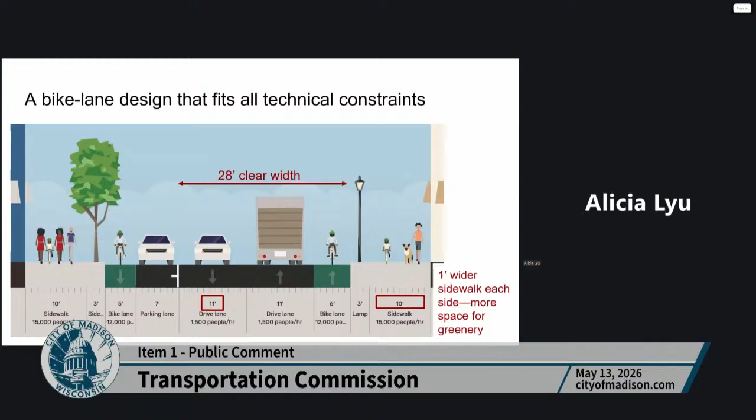And also, a difference between this design and the default design is that it uses regular travel lane width, 11 feet, which is the upper bound recommended for Community Main Street. Next. We have 1 parking lane which can alternate between blocks, so we can put it close to the small businesses. Next. But this option was never presented by staff, despite that it appeared in multiple oral and written comments and was asked about by commissioners. Next.

So these are the stats. Basically 75% of the students prefer the bike lane option and only 17% of the students prefer the current option. So I want to pause for a bit and let this number sink in, because are we sure we want to spend millions of dollars to design for the next 20, 30 years for a design that does not have a mandate from one of the most important populations in this area? Next. So just to make it more intuitive, next.

Some representative comments: space for more pedestrians and more bikes should be a priority. Otherwise, more space for cars will only lead to more cars. And also, people believe that bike lanes can actually ease congestion because it moves more people, and it also slows down traffic and increases safety. And also, eliminating parking can just make the space more clear for drivers and also increase safety.

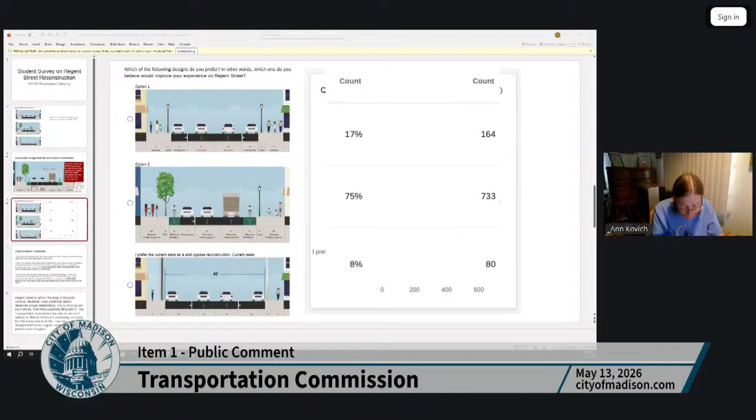Did we have anybody else under item 1, Aiden? We do not, no. Okay. Does anybody have any disclosures or recusals this evening? I don't know why a person in the attendees has their hand up. I don't think that's appropriate right now. Just gonna let that be.

Next, we have 2 items proposed for the consent agenda. Item 2 regarding the grant for Safe Streets and Roads for All, and item 3 regarding a contract with AECOM Technical Services. Does anybody wish to have either item separated from the consent agenda?

Okay, seeing no hands, do we have a motion on the consent agenda? Chris? Yeah, move approval of the items on the consent agenda. Okay, thank you. Robbie? Second. Okay, there's a motion and a second, assuming no discussion since it's a consent agenda. I'm going to assume unanimous consent vote, unless anybody wishes to vote no or abstain. If so, please raise your hand. Okay, the motion is carried.

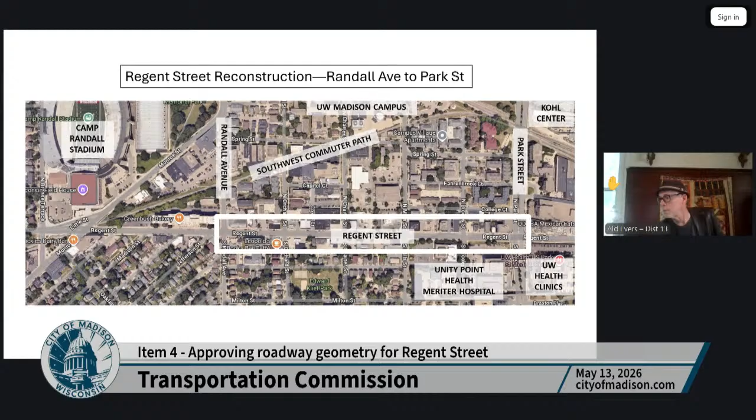Alder Evers? Yeah, the individual who had his hand raised in the participant section, Eris Blevins, he's the chair of the Greenbush Neighborhood Association. He has registered to speak. That's why his hand was raised. So perhaps he'll be called upon to speak. Since he registered at this time, it's up to you how you want to handle that.

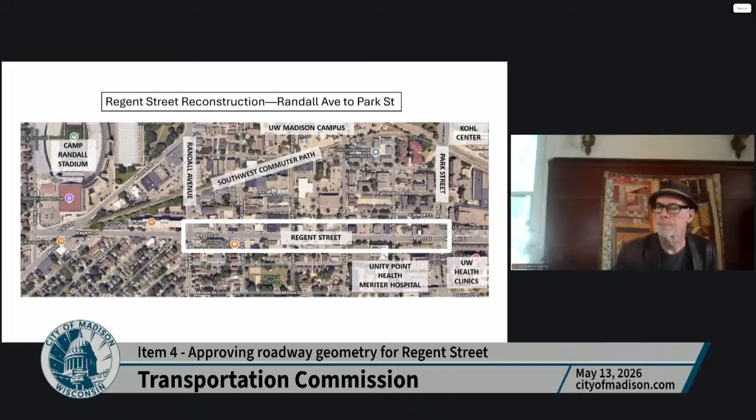So thanks, Alder. Alicia Lyu registered to speak under item 1, which is normally items not on the agenda, but apparently she had a plane to catch. So what I've proposed is what we would normally do is hear from staff with the presentation, and then we would go to people who are registered to speak on this item, and then we will go to discussion and questions. Yeah, that's great. Thank you. Okay, sure. Okay, so Tom, do you want to go ahead?

So again, let me just say first that this will be the 4th time that Regent Street has been back in front of the Transportation Commission. And we did make a recommendation to the Common Council and the Board of Public Works at our April 15th meeting. And on April 22nd, the Board of Public Works recommended that it come back to the Transportation Commission for further discussion of the Regent Street lane configuration between Brooks Street and Park Street. And staff wanted us to look at Mills Street between College Court and Bowen Court. So that's why we have it back here again today.

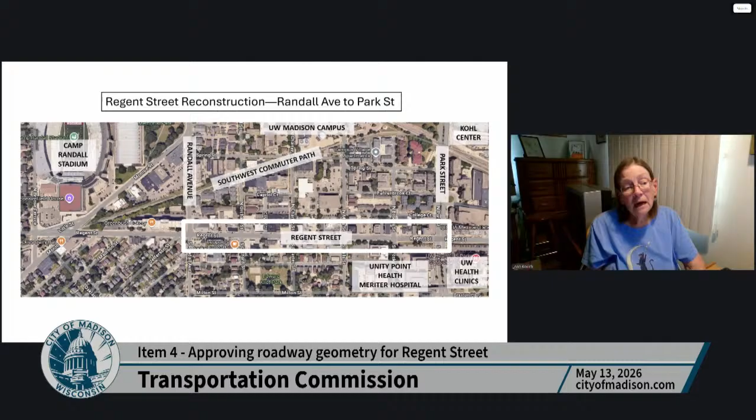And so we'll hear from Tom Moore, and then we'll hear from the people who are registered, and then we'll go to comments and discussion. So Tom? Yep, thanks, Ann. That was a good summary. That was actually my next slide, just going over the background of why we're back here. So my presentation is going to be specific to these issues. I'm not going to do the whole presentation. So these 2 areas, Mills Street and then the block between Brooks and Park, are what we're going to focus on. So first, Mills Street.

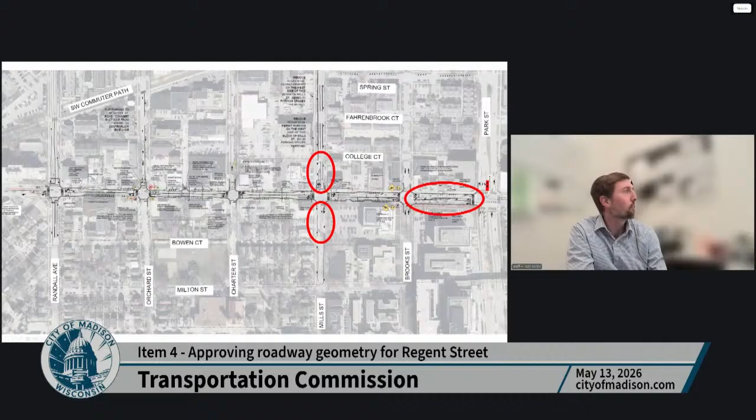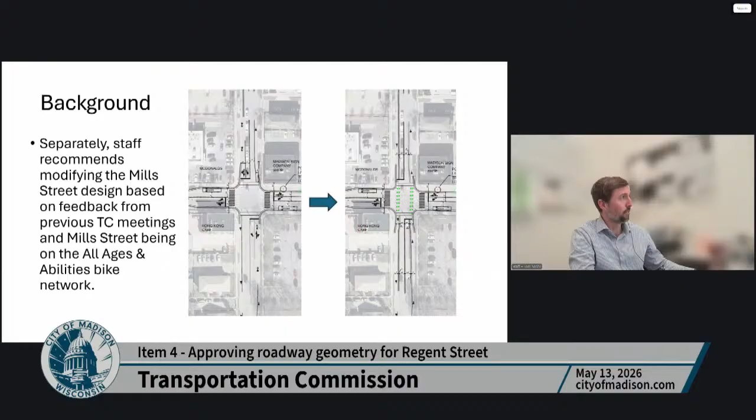On the left was the design that was in the original proposal that maintained the existing lane configuration on Mills as traffic headed into Regent Street. Since then, and based off of the discussion that we previously had, we looked at extending those buffered bike lanes right up to the intersection. Mills Street is on the All Ages and Abilities Bike Network. We were thinking that this would be focused on Regent Street and we would come back and deal with Mills later. But doing this now allows us to tighten up the radii at the corners, which is a pretty big improvement, especially at that northwest McDonald's corner where space is really limited. So we think this is a good thing to include in the project.

We modeled it; this was a concern brought up about delays on Mills Street. And one of the big topics that we haven't brought up yet is that right now there is no vehicle detection on Regent Street or the side streets. So the existing signal infrastructure is really rudimentary. It's about as basic as it can possibly be. With upgrades to the signal infrastructure, we're going to be able to handle traffic in a much better way than what we do right now. So removing those lanes is not a concern for us. Queues get a little bit longer, but nothing that is a concern.

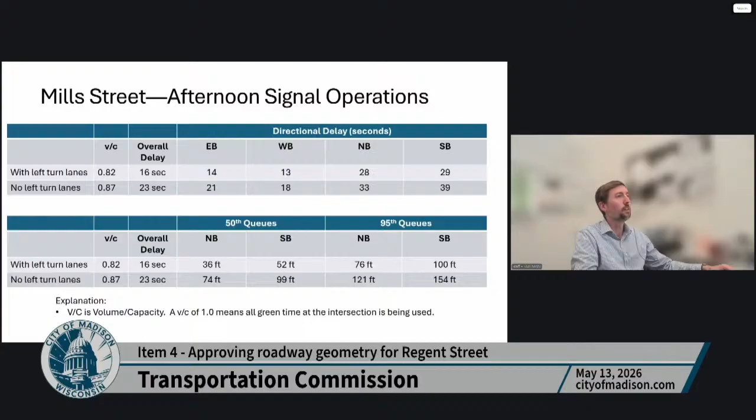So we think this is a good change in the design. So again, Mills is on the All Ages and Abilities Bike Network. Reducing the lanes allows for tighter corner radii at those two corners where we don't have right turning vehicles right next to the curb anymore. And then this change can be pretty easily managed with the signal timing. So that's Mills Street. It's pretty straightforward. And now I'll get into the Brooks to Park Street, which is a little bit of a bigger conversation.

So I just wanted to include some crash data in this presentation. This is the crash data at the Brooks Street intersection. So we've got some different things here showing the diagram, how those crashes took place, the type of crash. There's some left turns, side swipe, right angle crashes. Just some statistics: it's 113th of 1,800 intersections in Madison, 18 crashes over the 5-year period.

The colors represent the different severity of crash. The time of day. One interesting thing is that although at this intersection the concern was the morning rush hour, there were no crashes during the morning rush hour. During the morning rush hour, the heavy movement is a westbound left turn from Regent Street to southbound Brooks Street. But those crashes did not occur during that peak time in the morning with people going to work.

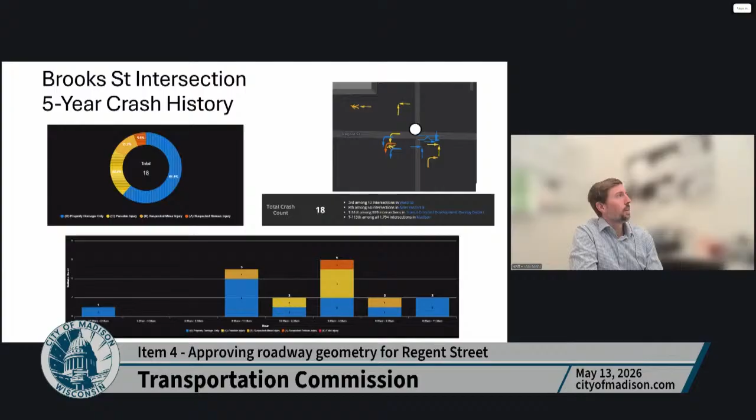So next, the Park Street intersection. So a lot more crashes here as expected with the higher volume. Left turn crashes are the highest type of crash. You can see it's ranked 24th among about 1,800 intersections in Madison. So this is a high crash intersection. You can see by time of day, the afternoon peak hour is the higher time for crashes at this location.

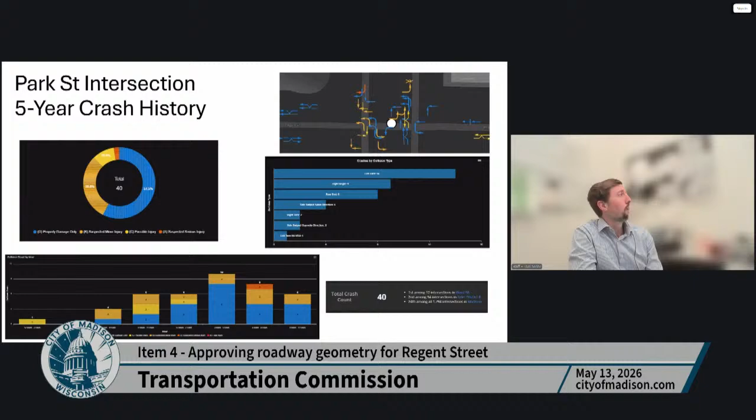So now to get into the options. So we laid this out as different options with the pros and cons, and I'm just going to go through each one here. So option one is the existing option. This is basically what the Board of Public Works approved when we were there last week. Maintaining the existing cross section, we can narrow it down. The curb to curb width here, existing, is 48 feet. If we were to go with this option, we would narrow it to 44 feet.

This has the shortest pedestrian crossing, 44 feet versus 54 feet today. Today it's longer because the crossing is closer to the intersection, so it's longer than the street width on the mid block. This option also allows us to stay out of the UW Health property. We would not have to impact their property, and there's a couple existing mature trees there that we wouldn't have to get into.

But the cons of this is that it does not allow for protected only left turns. Right now, that eastbound left turning movement is protected permissive. So they get a green arrow at the start of that phase, but then left turns after that have to deal with westbound traffic, looking for gaps. So the conflict today is with the eastbound left turn and westbound traffic, and the eastbound left turn and pedestrians in that crosswalk on the north leg. So there's an increased crash risk with those conflicts, and we feel this is not the safest design.

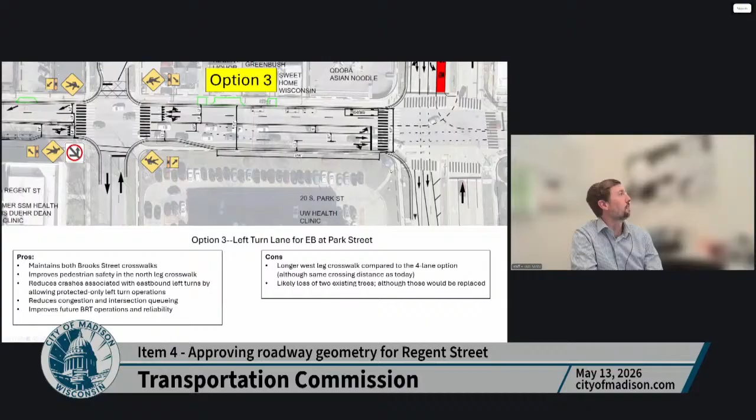We would have both crosswalks at Brooks Street. This would allow us to put rectangular rapid flashing beacon push buttons on all 4 corners to activate the RRFB from either crosswalk. And then I think I went through everything there. So cons, we would still need to get into the UW Health property here with those trees. Again, those would be replanted with new trees. And then the crossing distance is about the same as today, but longer than the 4-lane option.

Now, a separate option we looked at is instead of separating out the left turns, separating out the right turns. So this is similar to the previous option. This option actually has the best, at least in terms of our modeling, the best results for queuing and staying out of the Brooks Street intersection because we were able to overlap this right turn. So this right turn can get the green the same time that the northbound left turn gets their green. So those two phases could run simultaneously. So this one is the best operationally for traffic and queuing.

But again, this is keeping those permissive left turns and the issues that we talked about with that. But we did want to include this because we did look into it since then.

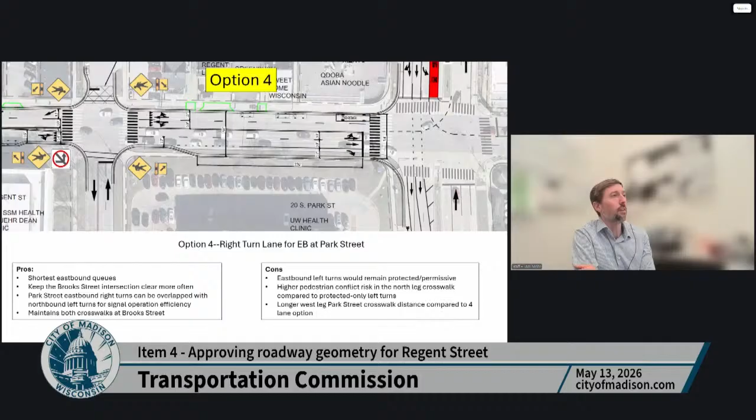These queues might be more useful. This is the 50th percentile queues. So these are the median queues. So you can see, with the 4-lane option, it's extending through Brooks Street. So that's where we're seeing regularly that this intersection is having issues. And the right turn option kind of shows how they're staying further away from the intersection. The other directions are about the same.

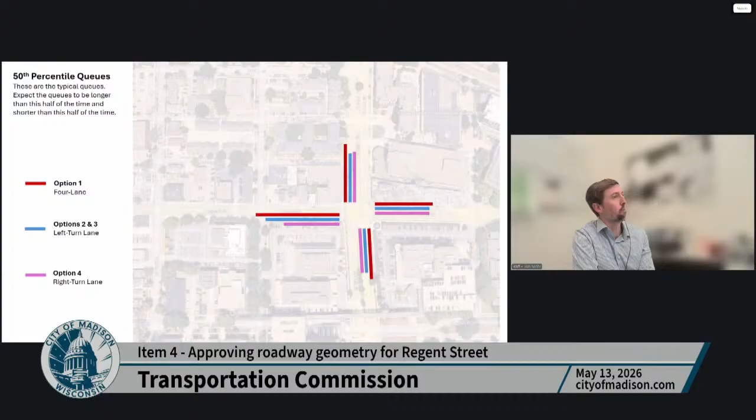Just to compare these for capacity and approach delay. So with the 4-lane option, we would run a longer cycle length. So it'd be a 130-second cycle length, although these would be running free. So this intersection wouldn't be coordinated with any other intersection. It would just be on its own. But by only having the 4 lanes, it would be a longer cycle. And then for the approach delay, this is basically showing how the additional delay is likely going to be moved to southbound Park Street.

And then the pedestrian delay, you can see that this is kind of the delay for pedestrians arriving at the intersection to cross under their worst case scenario, where they're getting to the intersection and then having to wait for the walk light. So because of the longer cycle, there's a little bit more delay for the 4-lane option. The V over C, that's volume over capacity. With the 4-lane option, we're right around that 1, where it's right at capacity. And then the other options are a little bit lower. So that just provides us more flexibility with signal timing and maintaining good operations at the intersection.

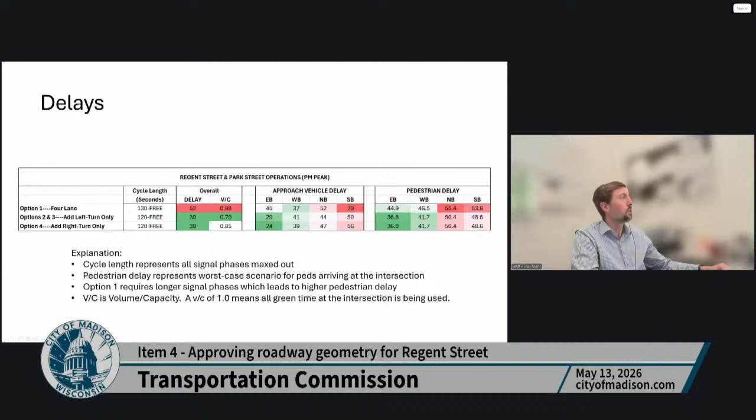So our recommendation, I'll just read through this. Although the west leg crosswalk would be longer, staff recommends adding a dedicated left turn lane at Park Street for the eastbound direction. The operational and safety benefits of a protected only left turn phase at this intersection outweigh the drawbacks of the longer crossing distance compared to the 4-lane option. This crosswalk distance would remain the same as it is today, and the overall intersection pedestrian delay would be lower. So the key benefits, it eliminates those conflict points between eastbound left turning vehicles and pedestrians in the north crosswalk, and for westbound traffic.

So it improves eastbound through traffic operations and reduces side swipe and rear end crash potential. And then this would also improve the future north-south BRT reliability and performance.

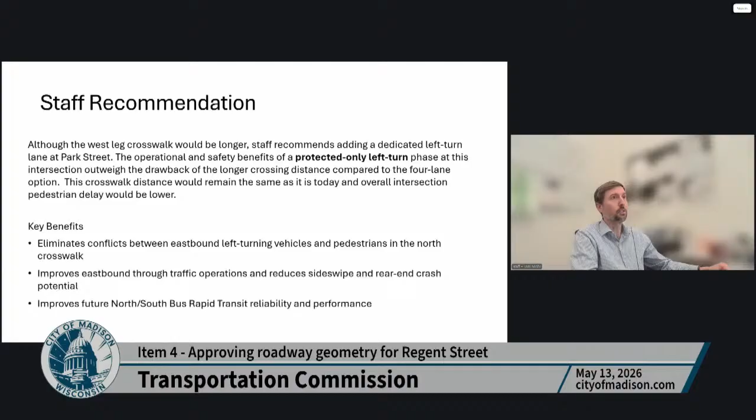So with this recommendation, we provided this slide for recommended motions. We have them separated out. So move to approve the Mills Street lane configuration. And then for the second option, it would be move to approve the lane configuration between Brooks and Park Street, which includes whichever option. After internally talking this over more, our recommendation is an eastbound left turn.

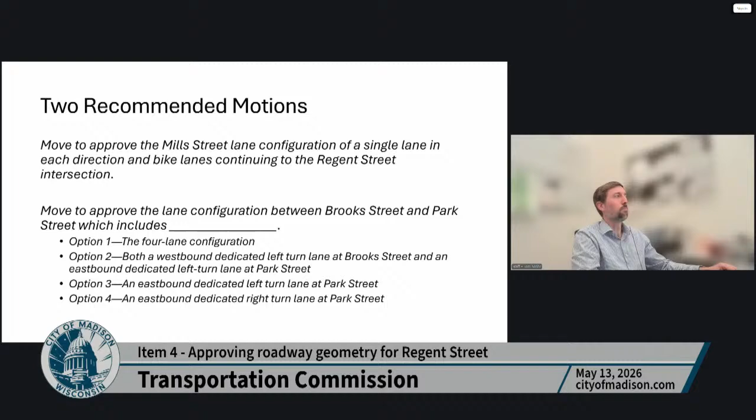We were kind of thinking option 2 or option 3 are about the same, but really option 3 provides the benefits that we're looking for and also maintains the pedestrian crossings at Brooks Street and still does a good job of keeping that queue out of Brooks Street. So option 3 would be our recommendation as kind of not what was approved at TC last time and not what was approved at Board of Public Works, but something in between. So that is our presentation.

Oh, you're muted, Ann. Thank you so much, Tom. Ariana, it looks like Lynn Olson did finally get into the meeting, but she's in the attendees queue and she needs to be moved into the panelist queue, please. Okay, yep, she should be moving.

Okay, thank you. All right, so pretty sure we have a lot of people registered to speak, Aiden. So who do we have first? So first we have Nicholas Davies of Regent Street, opposes and wishes to speak.

Good evening. In the near future, Regent Street will have hundreds more residents who live and or work on Regent Street. For these hundreds of people, most trips will start and or end on Regent Street itself. Whether the street outside your front door has a bike facility or not matters a lot to your ability to get around by bike. A week ago, I was in Paris, where they have been rapidly transforming their street network, creating not just isolated bike through routes, but a bike network that reaches into all of their commercial corridors and arterials. And they're not leaving any streets out based on the short-sighted whims of business interests. The comprehensive network effect is what has sent cycling mode share sky high.

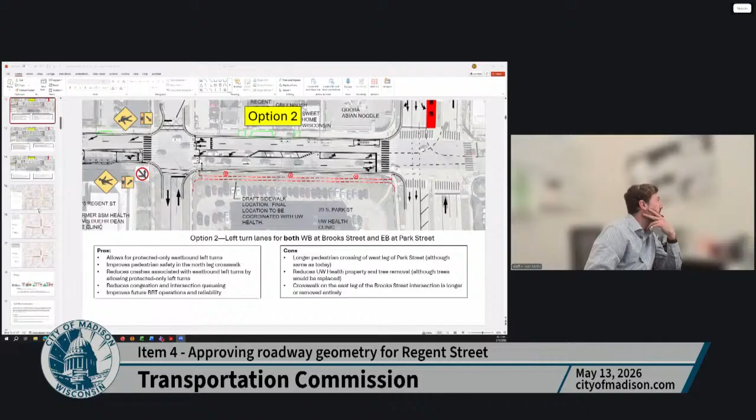Alder Okovich, go ahead. Yeah, thank you, Anne. So Tom, I emailed you this question before, but looking at option 1, I was wondering specifically about a configuration that keeps the narrowed crosswalk on Park Street, at Regent and Park Street, but also has just a dedicated left turn lane with a combined straight and right turn lane on option 1. Did you look at that? Yep. Let me pull it up here. So yeah, we did model that today, and I'll show you kind of the results. Okay, so we kind of just added it to the table here.

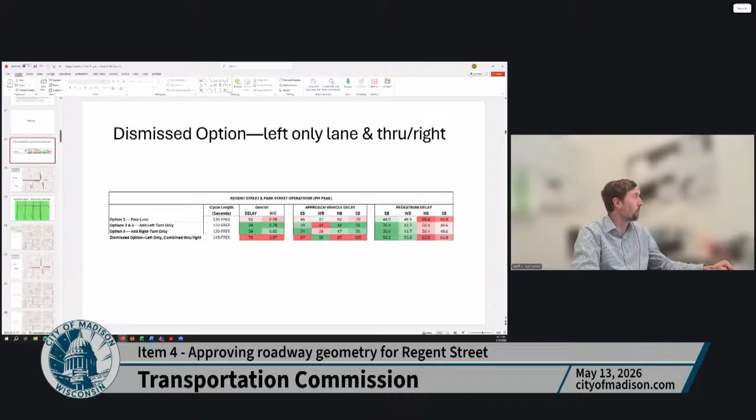So this option would be a left only, and then combining the through and right. So it would be the same width for the crosswalk, but we wouldn't have the 2 eastbound through lanes. It would be 1 combined through and right. So basically everything just gets more congested. The volume over capacity is over 1. You get a lot of delay and backups. You can see southbound Park Street really takes the biggest hit, and then eastbound Regent Street. So they're both really struggling.

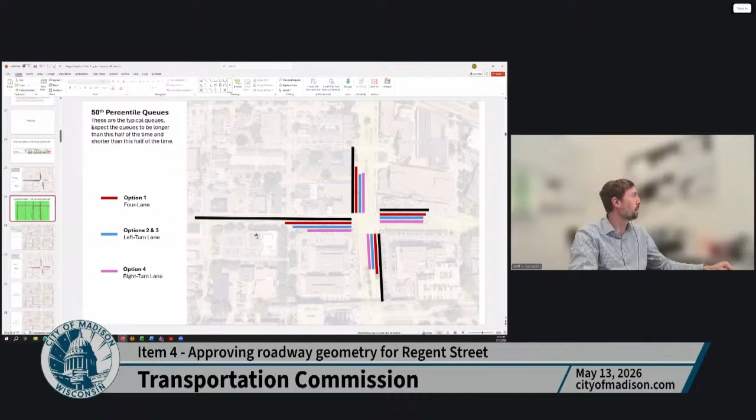And what ends up happening when we modeled it in SimTraffic, where it's an actual model, is that the Brooks Street intersection just really never clears. So any sort of traffic northbound Brooks just continually backs up, and then eastbound Regent Street continually backs up. So this is showing the queue going through the Mills Street intersection. There's just a lot of eastbound traffic, and going down to only 1 eastbound lane makes it just not work. Here's a picture of the model showing what happens on Brooks Street. There's just no gaps at all in the eastbound Regent Street traffic, so there's no opportunity for Brooks Street to move.

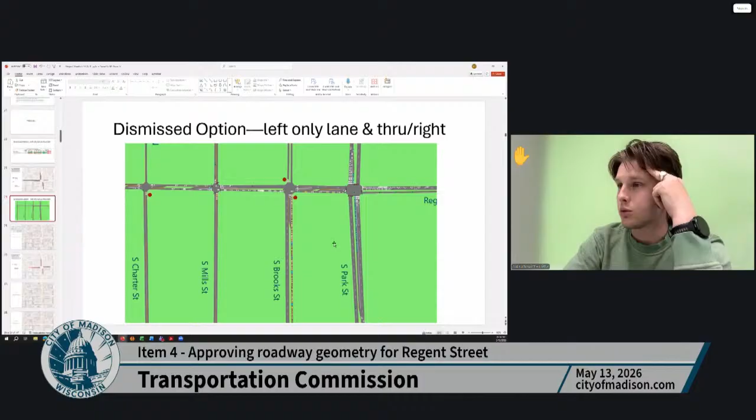Yeah, I guess what surprises me about that is that it's also only 1 lane the rest of Regent Street. So how can it have such a... Yeah, it's 1 lane, but it's the signal timing at Park Street where we need to give more time to Park Street that then allows this traffic to queue up and keep the Brooks Street intersection open. And this is with the BRT timing, so that does play into it as well. Because you mentioned right now there is no detection on Regent Street. So is this timing with detection?

Yes. This is a stop controlled. Brooks is stop controlled. It's not signalized. So pretty much under this scenario, anyone on Brooks Street would be relying on traffic to wave them in, which the model doesn't do. So that's likely what would happen under this scenario. But then what that would mean is just more queuing through the intersections on Regent Street in that case, if people were waving Brooks Street traffic through.

Okay. And then the other question I wanted to ask, is there any emergency vehicle prioritization on Regent Street right now? Right now, there is not. No. And that's one of the things that will make things a lot better for emergency vehicles. So what we can do and what we plan to do with this project is provide that detection. So if there is like an ambulance or a fire truck at Randall, we can clear out eastbound traffic. So that vehicle can have all Randall, Mills, and Park Street go to green and flush out eastbound. So that will be a big benefit to emergency vehicles because, right, there is nothing right now for that. Okay.

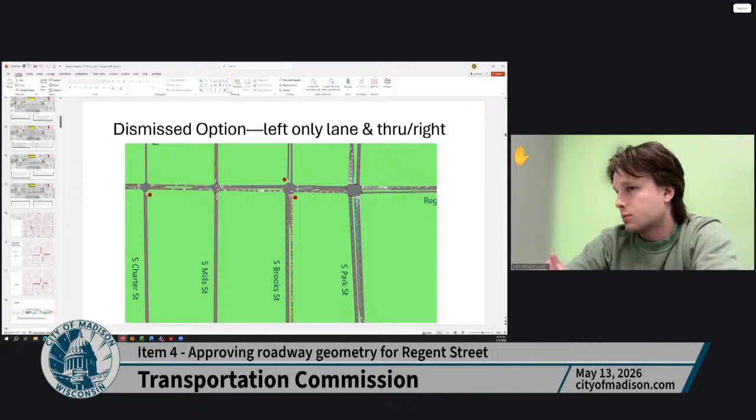Last question. I guess two questions related to blockage at Brooks Street. Right now during peak rush hour, which is basically the afternoon rush hour, is when we would hit the 95th percentile queue length. Do you know if in general we get better driver behavior around not blocking intersections if it's one lane versus two lane?

Just anecdotally, it's kind of the same situation as on West Wash at the Southwest Path when there's two lanes. It's difficult for anyone on the side street when there's two lanes because they've got to make sure both lanes are stopping, where in this case, with one lane, it's a lot easier. And then you don't have the issue of the one driver yielding to the side street and then at the same time blocking the view of the driver in the adjacent lane.

So, right, that's part of the reason for going to this option 3, and this is very hard to model, is whether the intersection is blocked or whether it's not blocked, and drivers can get out or get in with this left turn, the westbound left turn. We do think that with the one lane that will operate better for those movements. Okay. I will leave it there. Thanks, Alder. Chris, go ahead.

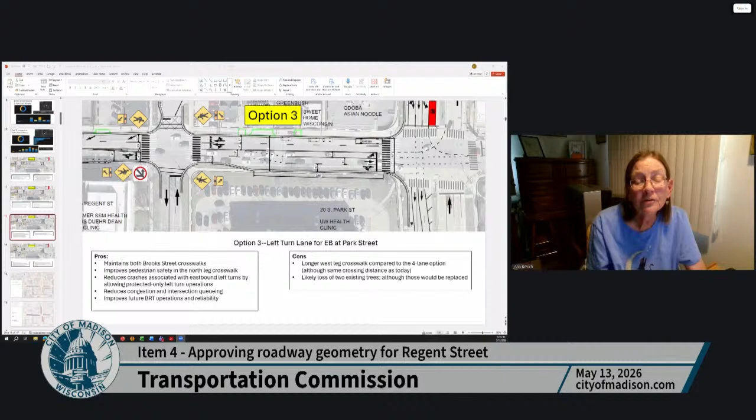Thanks. First, I just have a process question. I don't know if this is for Ann or someone else, but with the back and forth with Board of Public Works, if we recommend, say, option 3, what's next? Because that wasn't what was approved by Board of Public Works. My understanding is it would go back to Public Works because they're in control. They have to make the final recommendation to the Common Council. So whatever we do tonight would go back to Public Works is my understanding. Okay, thanks.

And then a question for Tom. On option 1, from where we sit, it's kind of hard for us to weigh the trade-offs between the downsides of the longer crossing on Regent at Park Street, versus the left turn conflicts that we're talking about, eastbound from Regent to Park Street. And I'm not concerned about the vehicle delay so much, but we're talking longer cycle lengths, more delay for pedestrians, and potentially more of those left turn conflicts with pedestrians. Could you just talk us through that a little bit more, what's the standard for cycle lengths and pedestrian delay?

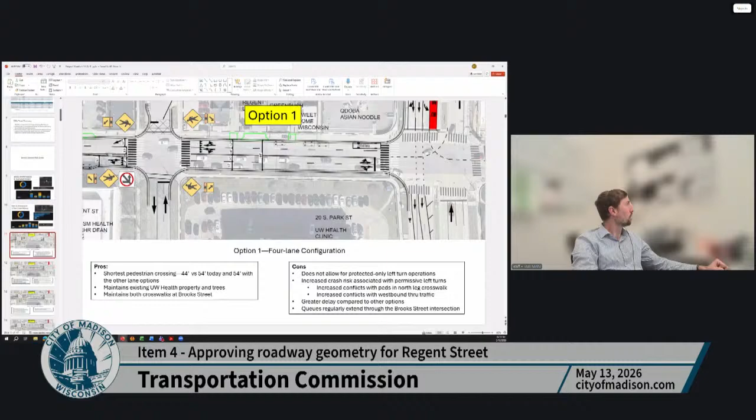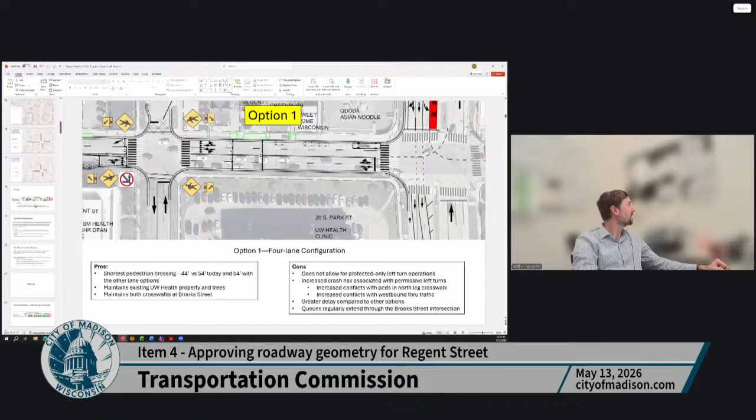Yeah. Good question. Thanks. Let's see. Thought I had it here somewhere. 1 second. Here we go. So we're modeling option 2 and 3 as a 120-second cycle length. That's 2 minutes. That's a long cycle length. I think the highest cycle length that we have is probably the Hairball, John Nolen, Willy Street.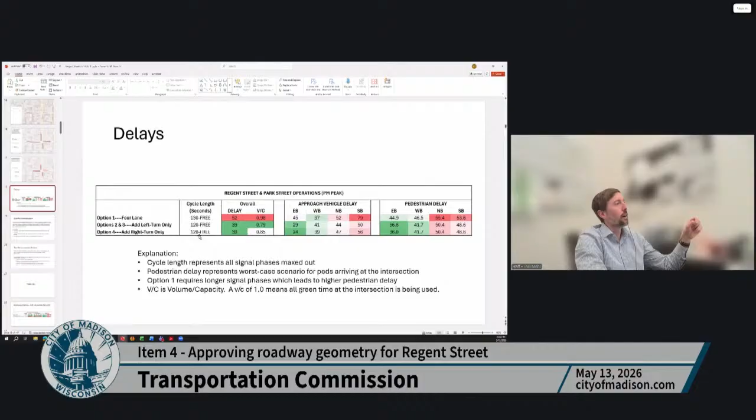And that gets above that, but typically for a long time, any of our coordinated corridors, University Ave, Johnson, East Washington Ave, the cycle length would be 110 second cycles, and we were always very careful to try to cap it at 110 seconds because that gets to be a long delay for the side streets. So these are long cycle lengths, but you also have to keep in mind that this is running free. So this is the cycle length when everything is maxed out, which will likely happen in the afternoon. So that 10-second difference, that's not nothing. That's substantial. If we could go lower than 120 second cycles, we would, but this is what operates the best, given all the different variables that go into it.

What will happen in the real world is we will watch it play around with the max timing and the different options when it's going on, and try to make it as balanced as possible. You just can't make it perfectly balanced, so there's always going to be one direction that's a little bit more congested than others. In this case, it is the southbound Park Street direction that takes probably the biggest hit when going to the 4-lane option.

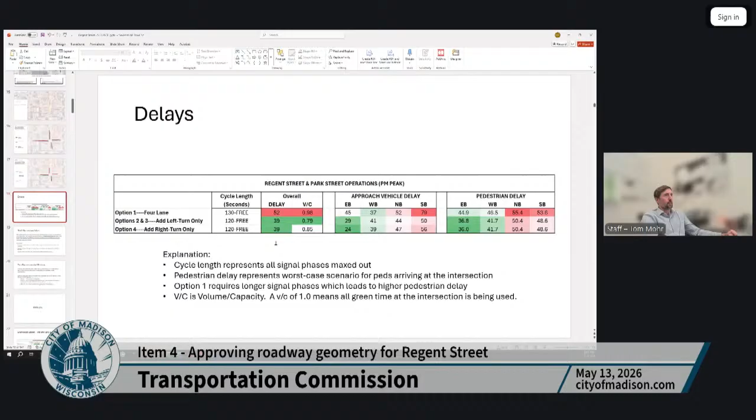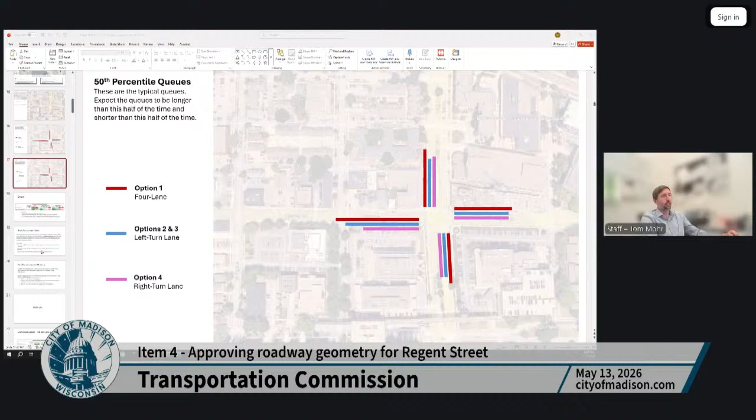In terms of protected only left turns, we've seen really good results on East Washington Avenue in terms of crashes and safety improvements since we've implemented protected only left turns, and a lot of that went in with East-West BRT. So we think that is a pretty clear safety benefit in terms of option 1 versus 2 or 3. In this case, it allows a lot more options for us in terms of signal timing during the peak hour.

The eastbound gets the green arrow, pedestrians aren't moving, westbound's not moving, and then they get the red and they sit and wait until the next green arrow. Whereas today, the green comes up for eastbound and the green arrow comes up. So the first few vehicles can make that protected left turn, but then every vehicle after that is making a permissive left turn where they're looking for gaps in the westbound traffic, which there typically aren't many, and then making that left turn where pedestrians are something they have to look at at the same time as the gaps in westbound traffic.

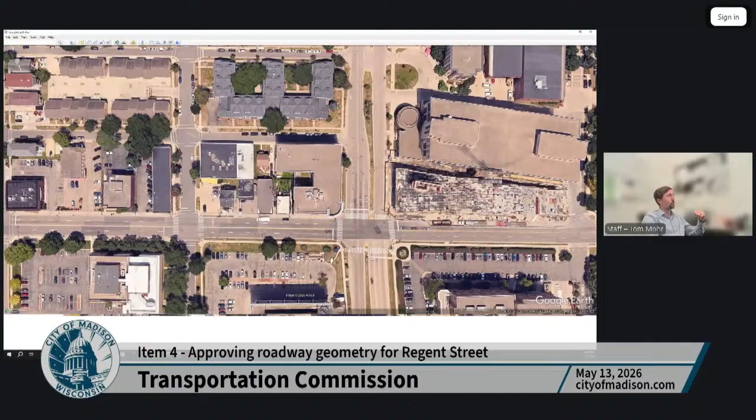And the trade-off being about 10 feet of pavement. It's a pretty small trade-off in our view, since this is a congested intersection, we're going to be providing that northbound. So regardless of pedestrians or not, we're going to be providing that time to get across here. And this northbound left turn will also be protected only. So these pedestrians aren't in the same danger as these pedestrians under the current situation. So the extra length here, which is a little bit of extra time, I think it's a pretty clear trade-off to provide the safety benefit to these pedestrians at the expense of this extra time crossing this crosswalk.

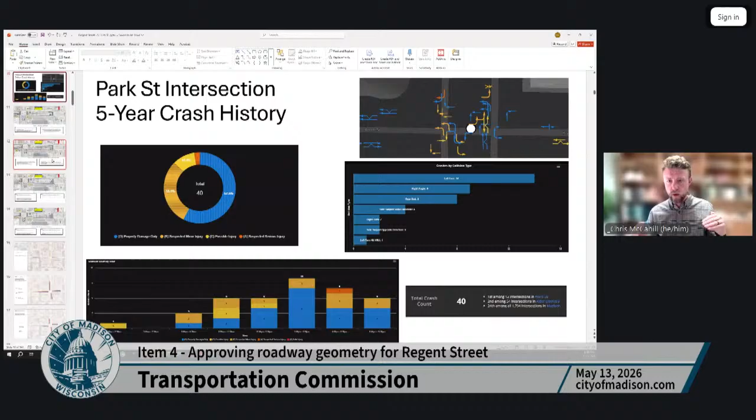Thanks. One more quick follow-up, just on pedestrian delay, right? So on that northern leg, we're seeing under all scenarios it gets into the red. Do you typically have rules of thumb for what happens when you get to a certain level of pedestrian delay? Maybe when do people start just crossing anyway or things like that? Are there rules of thumb around that kind of thing?

I don't know of any for pedestrian delay. I do know for vehicles, that's kind of when I was talking about the 110-second cycle, and we're giving like 80 seconds to the major street and 30 seconds to the side street, where the person on the side street is waiting that 80 seconds. That's where it starts to feel like, am I ever going to get the green? What's going on? So that's the concern with having these extremely long cycle lengths, that people will start to just go or think that there's something wrong. I think 55 seconds is getting close to a minute.

I don't know if it's at that level, at that timing, but it's a long time. It's going to feel like a long time standing out there. Okay, thanks. Chris, I just dug out my copy of the page from the last Common Council meeting, and it shows a referral back to TC today, Board of Public Works on May 20th, and then the council on June 9th. So that would be currently the plan.

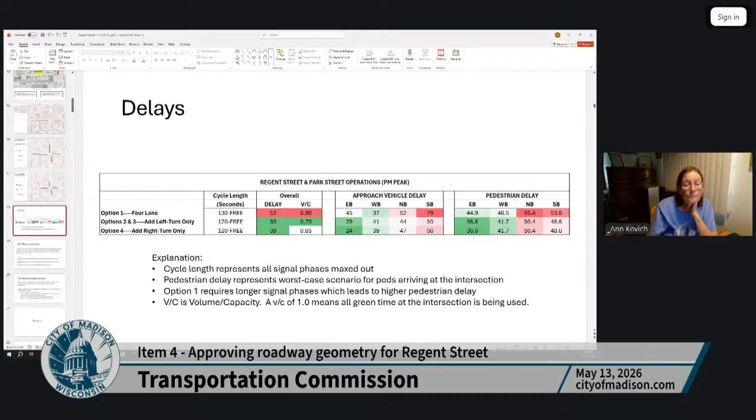Yes. Thank you, man. Sorry for that delay. I'm actually traveling at the NACTO conference, so joining from there. Sorry, trying to find the button.

No problem. So I have seen research on how much delay will cause a high likelihood for pedestrians to start to disobey the traffic lights. Generally, I believe that's about a minute or so. So if pedestrians feel like they're not going to be served after they wait for 60 seconds or so, there is a high likelihood that they're going to disobey the traffic signal. So just want to share that information. Thank you.

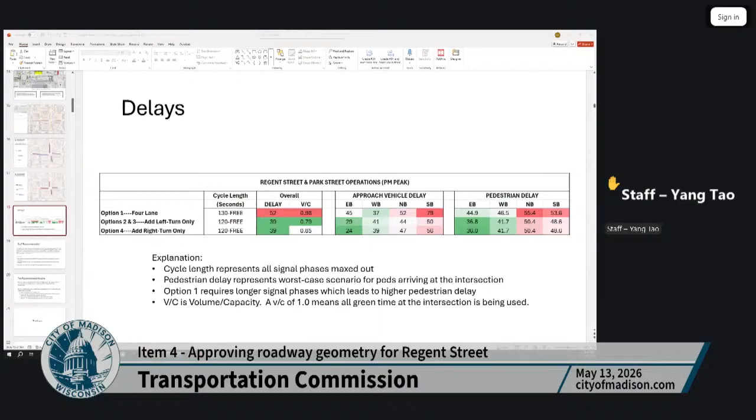Thanks, Yang. And to your point, Tom, you were saying these numbers on this slide are really reflecting the peak hour in the afternoon. Does that mean those numbers are going to be lower for people waiting during the rest of the day? Yeah, they'll be lower during other times. So the signal timing will change, especially since this would be operating free.

Right now, we have the Regent Street signals coordinated, so they kind of stay on 50 seconds this way, 30 seconds the other way, 50 seconds. It kind of stays within that. With operating free, it's on its own. So as there's less traffic, it's going to go through those phases faster.

So yeah, this is the worst case scenario during the afternoon. It's not going to be like this all day. Okay. So my next question is about, I think if I'm getting this right, the options I have, the right turn only lane or the left turn only lane, they have in mind easing the traffic of Regent, but then also I'm trying to think of the impact after the intersection and what would it mean, since we're bringing more cars than we were bringing before from Regent to Park, both northbound and southbound.

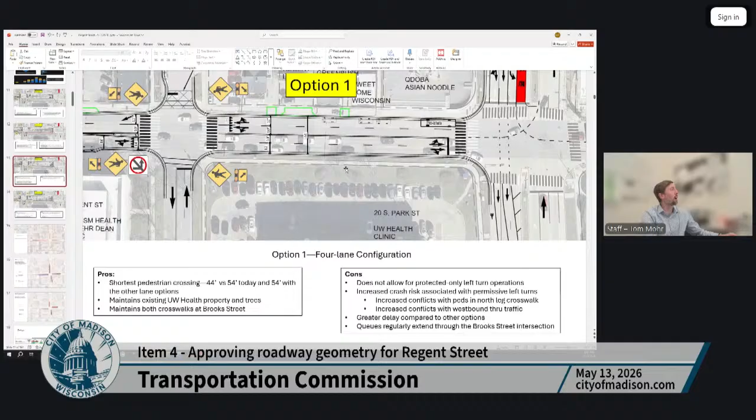But part of wanting to do this now is that this is going to be completely torn up with this project. The storm box that's 20 feet wide is going to come through here and through the Park Street intersection. So there are going to be pretty major impacts to traffic during construction, and doing it now would make a lot of sense in terms of how badly that's going to affect traffic. And again, we assume BRT is going to be here well before any UW Health expansion, so the benefits to BRT.

Matt Phair does appear to still be here. Did you wish to hear from him, Harold? Sure, why not? Yeah, can we have Matt, please? Hi, I'm here. So the question is just on what our plans are, if we have any. Yes? Yes.

So the answer is we don't have any specific plans. I assume, and our leaders assume, and I think we can all assume with the access pressures on our healthcare system, and this prime spot, we will be developing at some point in the future, but truly, and I'm not trying to evade the question, it could be 3 years, it could be 10 years, and we just don't know. So it could be longer than that for that matter. I know that sounds like a vague answer, but that's actually the honest truth at this point.

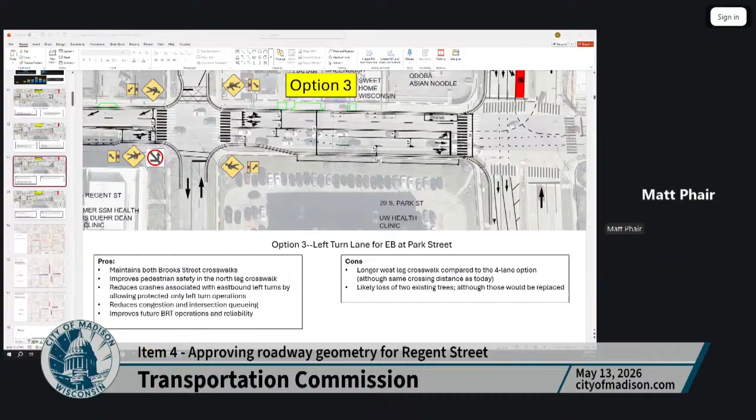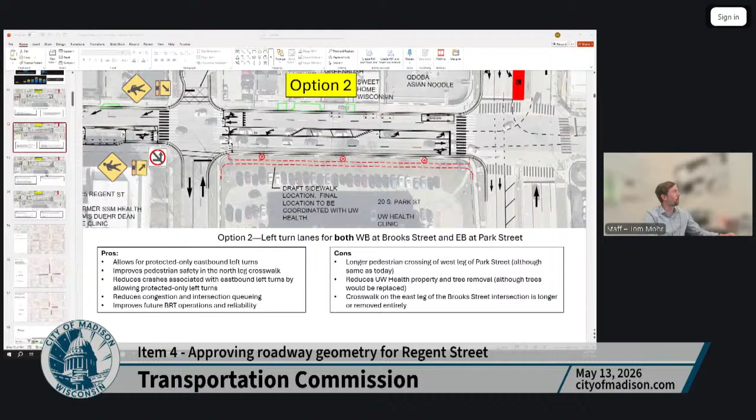You bet. Okay. And then option 2 was the one that TC previously approved. That's correct. Yes. And did that not have the crosswalk on the east side of Brooks Street? Right. Yeah. So when we proposed this, the idea was to move the RFB to just this side because of this longer crossing and the conflicts with the left turns, to have pedestrians cross on the west side rather than the east side. But yeah, with option 3, shorter crossing, we think this makes sense to add this in and provide the RFB on both crosswalks.

Right. Yeah. No, I mean, I think not having that crossing will just lead to people making a run for it. And speaking of pedestrian delay, yeah. Okay. Thanks. I think that's all I had for now. Thanks, Harold. Alder Kovich, go ahead.

Yeah, thank you, Ann. I guess one of the things I'm struggling with is just we have to trust the models a lot. And to Harold's point, there are instances when there might be less traffic. You brought this up earlier, Tom, and I feel like it's worth reiterating, but you were asked about pedestrian crossings. And you said it would be pretty long, and so pedestrians would learn not to cross there, because the delays are significant. But the same logic applies to a lot of the traffic flows that we're talking about right now, including delays at John Nolen leading to less traffic today. And so I just don't want us to fall into the trap of thinking that we're always going to be at maximal traffic, or the only levers that we have the ability to pull are the lane configuration at Park Street.

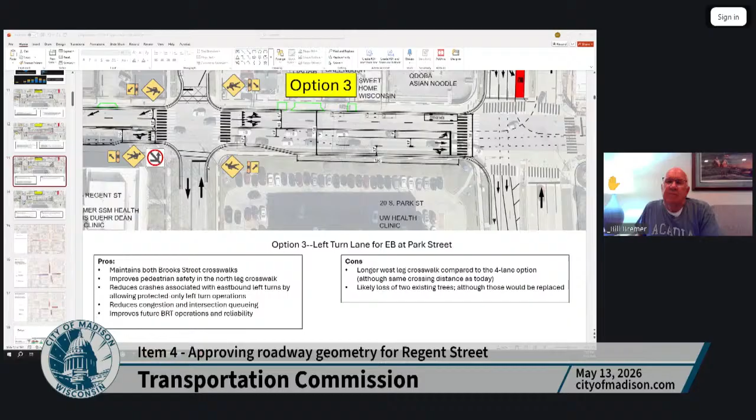I'm not in favor of option 4 because, as was just mentioned, sometimes I think people would treat that like a slip lane, and I don't want that to happen at all. So therefore I really like option 3. Thanks.

And I'd like to add, just thinking about this more. So option 4 with the right turn, even if we were able to limit that to a protected-only right turn on a green arrow, we've just had a lot of problems with compliance for right turns. Whereas left turns, they have the red arrow, they're pretty set, they're not moving. Right turns, we're going to talk about it in a future meeting about right turn on red, but the compliance there, I think we would likely see issues with that.

Okay, thanks, Tom. Thanks, everybody. Pepe, go ahead.

Question for you, Chair. There was a person that presented that presentation about the survey they did. Can I still ask them a question if they're still around? She had to go. She was on her way to the airport, and I don't see her in the queue yet, Pepe. That's why she registered under number 1, because she had a timing constraint, and I don't see her still available. Okay. Yeah, otherwise we could go back and ask her a question, but she doesn't appear to be in the queue

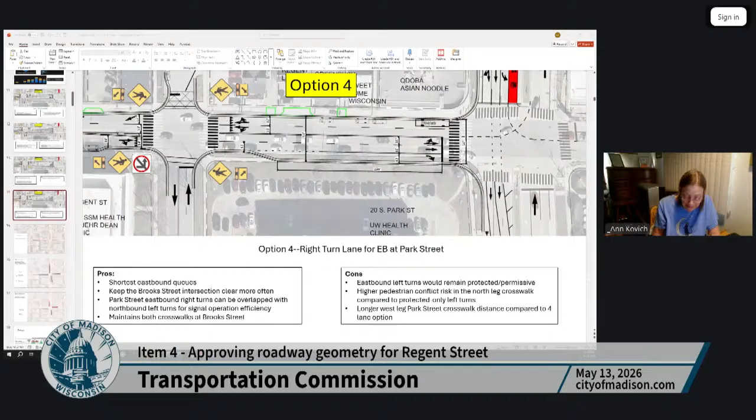So would that make sense, Chair, if I move the motion to approve the recommendation for Mills Street? Just to get that one out of the way. That would be, and the suggested motion is to move to approve the Mills Street lane configuration of a single lane in each direction and bike lanes continuing to the Regent Street intersection. Is that the motion you would like to make? Yep, I would like to move to approve the Mills Street lane configuration of a single lane in each direction and bike lanes continuing to the Regent Street intersection.

Okay, do we have a second? Alder O'Brien? Yeah, I'll second that. Okay. Do we have any discussion on the Mills Street? Carl? Yeah, thank you, Chair. Tom, since this is an option that came up pretty late in the process, how much room do you think there is still for refining it? I was thinking, did you look at an option that has a protected intersection where you don't have right-turning traffic probably moving into the buffered bike lane?

And I guess, I'm fully in favor of this. I'm just wondering, since it's been added late, if the details could still be refined. And I guess that would be something that would happen between now and approving plans and specs sometime later. Is that correct? Yeah, I think, if this is the general concept, it will come back with final design. So little tweaks like that could be added in. But yeah, the big concept here is removing those lanes on Mills to provide the bike lanes. Thank you.

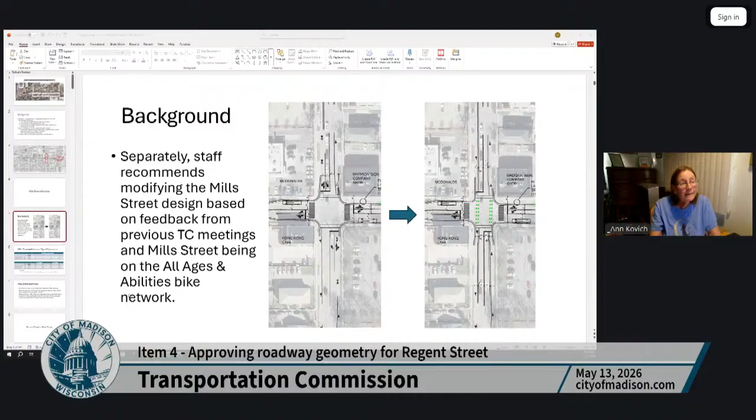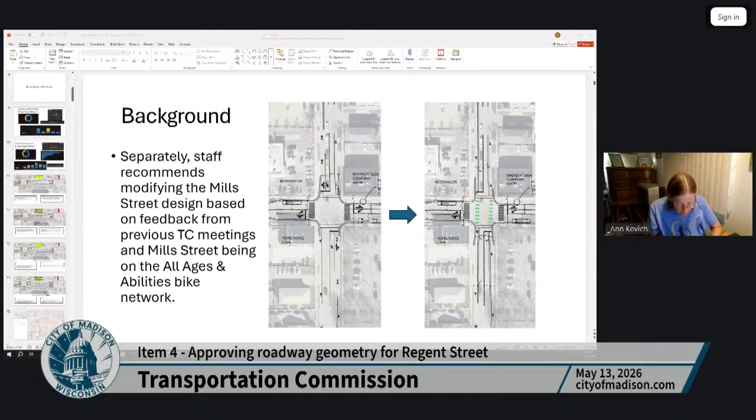Okay, I am going to assume a unanimous consent vote on this motion, unless anybody wishes to vote no or abstain. Please raise your hand. Okay, that motion is carried unanimously. Then we have the other issue with regard to the block between Brooks and Park Street that we've been talking about. Alder Kovich. Yeah, I will move to approve the lane configuration between Brooks and Park Street, which includes option 1. Do we have a second for that motion? Alder Evers, you can't second, sorry.

Since you're not on TC. Robbie, you want to second that motion? I'll second. Okay. We have a motion and a second. Discussion. Alder Evers, did you wish, or would you like to speak to your motion, Alder Kovich, and then we'll go

to Alder Evers? Yeah, I would just quickly say I chose option 1 because it's the first one and we need one to have a discussion. It's not necessarily the one I think is the best, but I do like option 1 or option 3, I think, are the two that I think are the best, but was picking option 1 so that we have a discussion. Okay. Alder Evers, go ahead.

Thank you, Chair, and thank you, Commission members. I'm not in favor of option 1. I think option 1 essentially represents the status quo. And the status quo, from what staff has shared, is unacceptable in my mind because the current status quo is a dangerous intersection. And there's been some talk about pedestrians and others and motor vehicle drivers avoiding this intersection for whatever reason, so that we don't really know how heavily it would be used.

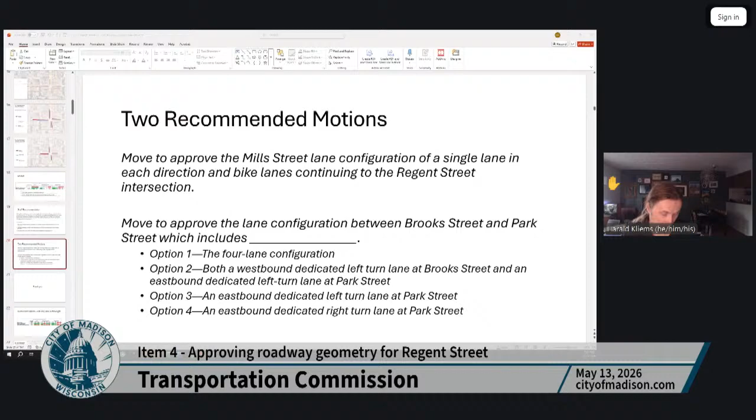And so with the options presented to us today for this particular block, I think option 3 is the best one. I think the protected left turns are a huge safety benefit and really important for the BRT station. But yeah, if the Common Council came back and said we have complete green streets and TC needs to go back to the drawing board, I would not be disappointed. Thank you. And that's still a possibility. Alder Figueroa Cole, go ahead.

Alder, I'm here. I'm sorry. I'm on the phone and I sure figure out where the button goes.

Again, seconding Harald's position on this. I think I heard one of the alders speak about discussions in the future about emergency services. I really would like for the commission to consider having discussions on a policy that will help us deviate from the complete green streets policy in a way that is more predictable, not this one-off, because honestly, this doesn't help anybody.

So you guys know me, I'm extremely supportive of this policy, and I get this is a very difficult project, but it just holds us accountable also to the public to have clear expectations when these types of decisions are made. So hopefully in the future the board can have a topic of discussion on how to use this particular project as an example to build a policy that allows for exceptions, and what that would look like.

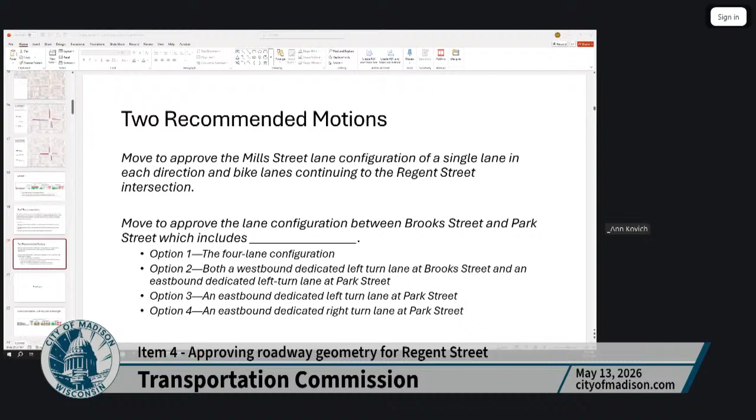Thanks, Alder. Complete Green Streets is going to be coming to TC at some point here in future months, and staff is keeping track of things like emergency access. We've talked about that a lot, and in my opinion, we need to see something in Complete Green Streets that addresses that. So that's something that we can look forward to in the future.

And I'd just like to take this opportunity to say I also support option 3, but I'd also like to make the observation that when this came to TC on April 15th, we supported option 2 because Board of Public Works saw something and asked questions and sent it back to TC. Staff came up with what I personally think is an even better option, which is option 3.

So what I would say is, wow, the process is working the way that it was designed to work with, in my opinion, the added benefit of having this conversation create an option that I think I heard Tom say he likes even better than the option they had last time. So in my mind, the process is working really well.

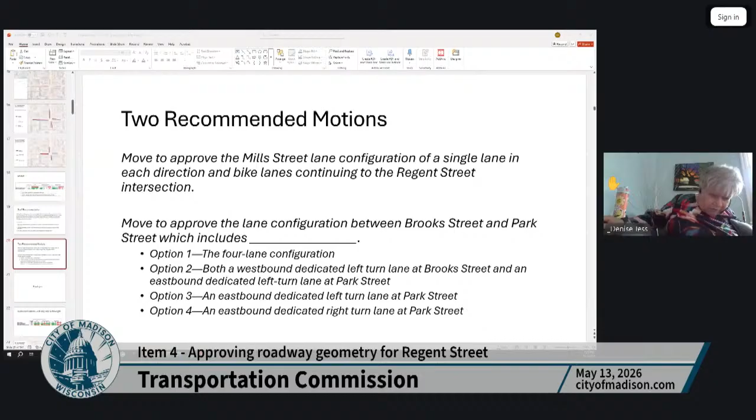Thanks, Denise. Hey, Ann, this is Yan. So sorry, I couldn't find my raise hands button. Oh, sure. Yeah, my computer is out of battery, so I'm joining from my phone.

Yeah, if it's okay, I want to add that as staff, we struggled a lot about this one as well. Especially, we really appreciate the thoughtfulness from all the public members, whether those are people who use this corridor on foot, by bike, or businesses. Those are definitely all valid inputs, and we really appreciate hearing those.

One thing we struggle with is how to balance and accommodate all the valid needs out there. My thought is that it really depends on how you view this. You can argue that this is a variation from Complete Green Streets. I totally see that, right? However, you can also argue this is in the spirit of Complete Green Streets, because my belief is that when we talk about Complete Green Streets, we're not talking about a particular street. We are talking about a network.

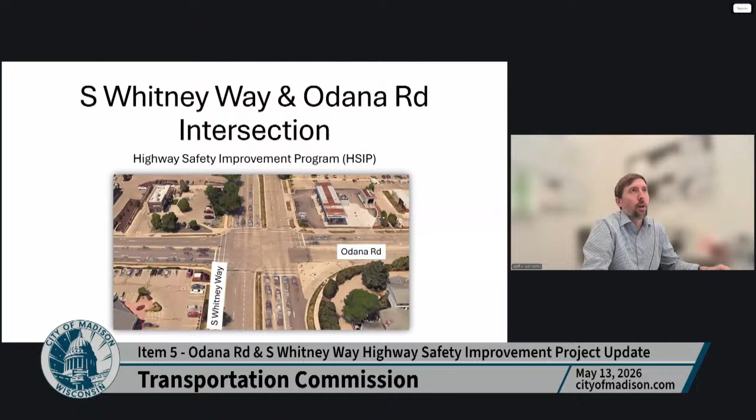Thanks. Yep, so this is the Whitney Way, Odana Road Highway Safety Improvement Program project. So this is a little bit of a different process, and I'll go through it. So what is a Highway Safety Improvement Program? So it's a federally funded program where the FHWA distributes funds to all 50 states. Those states then administer this program where different entities can apply to the state with project ideas, and then the state evaluates those projects and chooses whether to fund them or not.

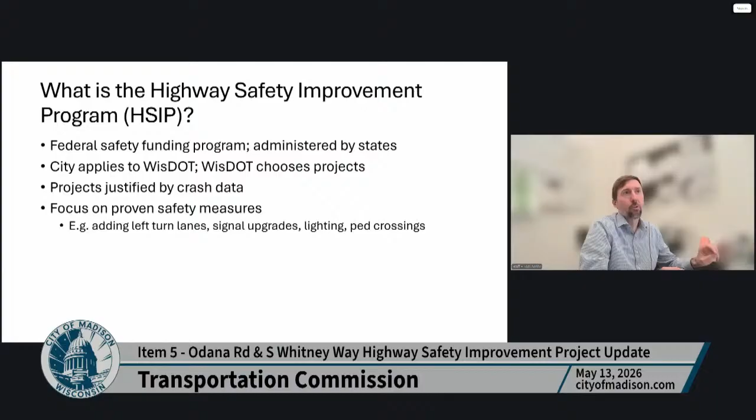These are kind of based off of crash data and based off of proven safety countermeasures. So things like adding left turn lanes, signal upgrades, lighting, pedestrian crossing improvements, things that are known to reduce crashes. So we had a similar project. I think actually these were applied for and received funding during the same year. This was at Gammon and Watts. This was constructed, let's see, I guess it would be 2 years ago.

So this project was very similar with similar improvements of upgrading all the signal infrastructure, adding signal heads over each lane, where in the past there was only one over a lane. Basically improving the visibility of the signals, redoing the crosswalks, pedestrian ramps, and then in this case, it was offsetting the left turns on Gammon Road. So with the Odana Whitney project, this was applied for and awarded in 2022. And this is right from the application of what we proposed for improvements.

So similar to Gammon Watts, we improve the visibility of signal heads at the intersection, convert the traffic signals to monotubes with signal heads over each lane. Use of retroreflective backplates on the signal heads would further improve visibility. Improve signal timing to meet MUTCD standards and to implement emergency vehicle preemption is also recommended.

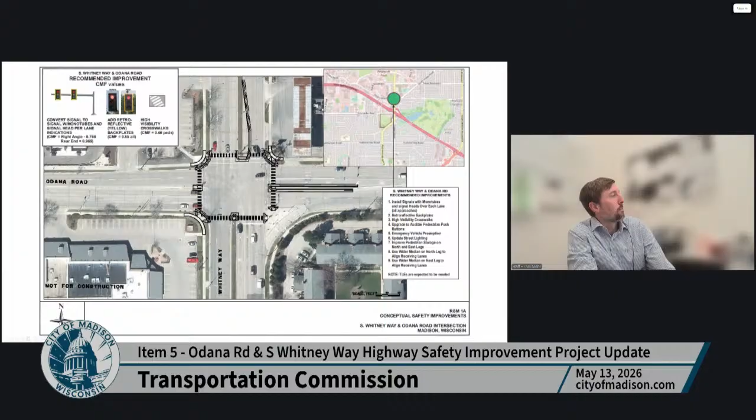And then we included the crash data from the time for the intersection. So WisDOT evaluated this and decided to approve it for funding. This was the funding that we were given: $120,000 for design, just over $1 million for construction and oversight.

And the way these projects work is we have an agreement with WisDOT on working jointly on the project. WisDOT bids the project, selects the contractor, and WisDOT manages the project under construction. So we're in that phase of doing the final design. This is what it looks like.

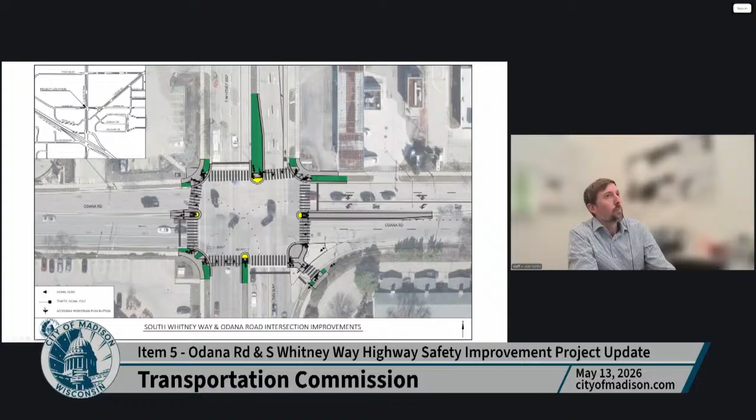This is expanding that north median to remove one of the northbound lanes. We're also shifting lanes around to provide a northbound bike lane between Odana Road and Tokay Boulevard. Otherwise, it's doing all those signal infrastructure improvements along with the pedestrian ramp improvements. Again, this is just showing the signal head placement, signal heads over each lane to improve that visibility.

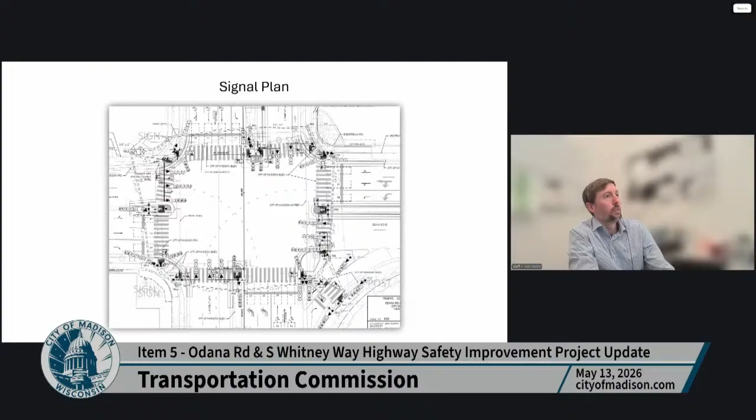Since we received this funding, there was a bad crash southbound Whitney Way where a driver ran the red light and struck a pedestrian that resulted in a severe injury. It's not a full intersection reconstruction. These are the limits of construction. It's just reconstructing each corner and median nose.

So here's a list of the improvements. So this is a full signal replacement. This will be accessible pedestrian signals, signal heads over each lane, high visibility yellow backplates on the signal heads, cabinet and controller replacement, video detection rather than the loops in the ground, and emergency vehicle preemption.

So we're widening each median, extending the median noses through the crosswalks, except the south leg median is not getting wider; it's staying the same width there. Again, removing that redundant northbound lane, adding in the bike lane, high visibility crosswalks, and removing this driveway to the gas station.

So this gas station has 4 driveways. We are removing the driveway closest to the intersection, which is not needed, and by far the least used. Almost no one uses that driveway. So project schedule. This actually came through the process in 2022. Back when this was proposed, it went to Transportation Commission, Board of Public Works, and Common Council for approval.

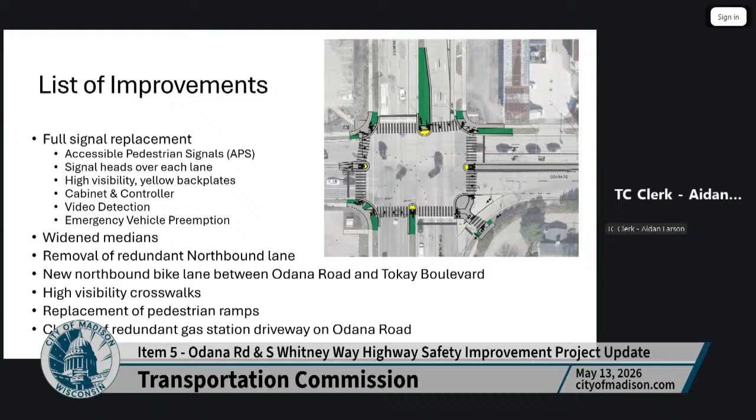Good evening. I should say up front that I prepared these remarks as if I was speaking to a commission that takes Complete Green Streets and Vision Zero seriously in a city where Complete Green Streets is part of city ordinance, and that'll become relevant as I go along. As a brief aside, if previously approved plans are non-compliant with CGS, the commission can and legally should move to reconsider them.

With that said, looking at Gammon and Watts, that's really not an example worth replicating. That project did very little to make the intersection any safer for people outside of a vehicle. And after having recently redone that intersection, it's now hard to foresee when and how that intersection is ever going to be made less hostile. Odana and Whitney Way is on the all ages and abilities bike network.

And I don't know if this project will be the one to add that segment of the AAA facility that's supposed to run through that intersection. But at the very least, we need to make sure that the changes that we're making today aren't going to make adding that AAA facility later more difficult or more expensive.

The project proposes eliminating a redundant northbound receiving lane on Whitney, and I appreciate that we're doing that. But with this road being on the AAA network, we should be taking that freed up space and blocking it off from traffic in a way that prepares for it to become part of that AAA facility. And unless we're going to put that bike facility in the median, then I don't think the median should be the one absorbing that right-of-way space.

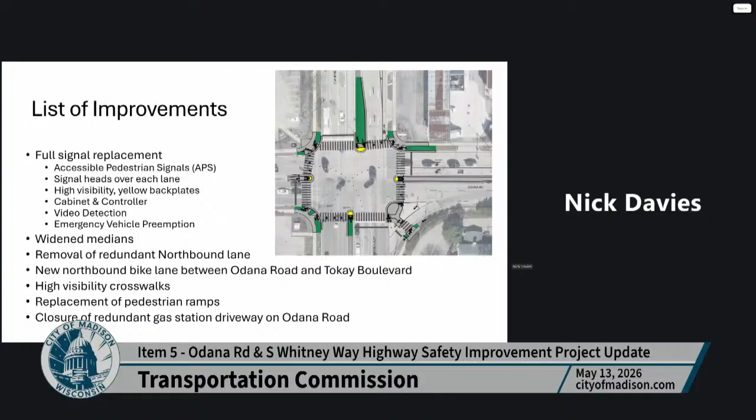Thanks for coming and sharing your comments. Does anybody have a question for the registrant? Okay, thanks for coming. Do we have anybody else, Aidan? Yep, we have one more person, Gabriel Hill of Presidential Lane, neither supports nor opposes and wishes to speak. Hi, can you hear me okay? We can, go ahead. Okay.

This intersection really matters to me. I use it every day to drive home. And as a kid, I had to cross it whenever I went to the YMCA, and the pool was over there too, on the southwest side of it. And I was reading some public comments that were written, and Jonathan made some great written comments about the slip lane, and I agree with him. That feature is just the worst aspect of this intersection.

Cars are still going highway speed when they come off the interstate, and you regularly see them going 45 or sometimes pushing 50 miles per hour through that slip lane. And when they take that turn, you can go out and watch it. Even when it's red, nobody stops. And when it's green, they just fly through there. And the bushes on the right side block it, so you can't even really see pedestrians when you go through there.

And even when I drive, and I'm somebody that bikes, is very traffic cognizant, I go through there sometimes faster than I should. And you can't see pedestrians when you go through there. So that slip lane is just dangerous. I don't think I need to repeat slip lane death statistics to you guys. You guys assuredly know how dangerous they are.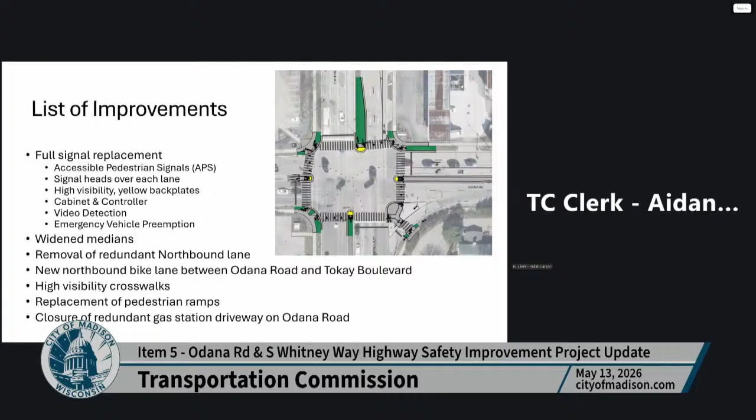Harold. Thank you, Chair. So maybe a process question first. Is this purely informational? Because the way you described it, we applied for it, WisDOT is doing the WisDOT thing. Can we change anything? Well, you'll have to ask Tom that. From a process standpoint, I can say that you can make a motion on this item if you choose to. Tom is going to have to tell us, because of how this is put together and funded, whether we can make changes.

Right, I was going to ask Tom. Yeah, but when we have something that's here for an update, Harold, you can still make a motion on it. So from a process standpoint, we can do that. Tom's got to tell us about the procedural part of it.

So I would just say that we're limited in what we can do based on the funding that we receive from WisDOT and the scope of the project that we applied for. The city's portion is 10%. The state federal fund is 90%. So anything other than tweaks to this would likely be outside of the project scope. The current estimated project is using pretty much all the funds.

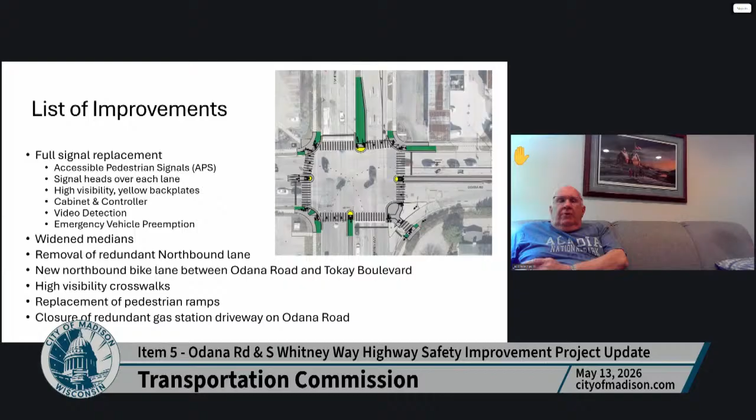Sorry? Was I misinterpreting that? Or Bill was describing we can't change the scope of, you know, changing this from a single intersection to a complete rebuild. But if we want to pay for things beyond what was in the scope of the original project, it sounds like that is possible. Yeah, if the city decided to add in a project, yeah. Right. Okay. Yeah, exactly. You can do more, but you just can't do any more with these funds. These funds are restricted to what WisDOT approved back in 2022. Yep. Okay. Thank you, Bill.

And yeah, again, I think what Harold was getting at is I think we should look at that slip lane specifically. I believe you that the crash rate at the slip lane is good, but I feel like it's already just overall a very hostile intersection for anyone who's not in a car, but the slip lane especially makes it really bad. And so I would like to see what the cost to the city would be and if we could do that.

Cost to the city to remove the slip lane? Yeah. Tom? That would have to be, removing the slip lane would likely have to be a separate project from this project. Yeah, like I said, we did look into that and decided to not go that route. I'm just trying to think of how that would work if we were set on that. If the city decided to do that, we would probably have to reduce the scope and take off that section of this project, which I don't think we want to do.

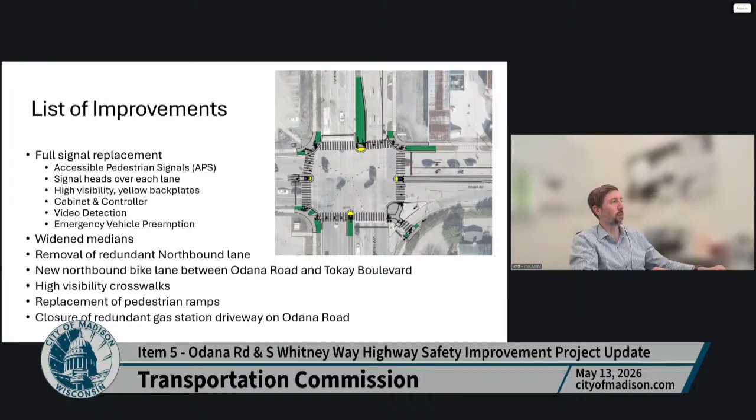Alder Hokovich, go ahead. Yeah, I live on Johnson, or Gorham and Johnson and Blair, and that's a truck route too, and it's a right turn onto a 2-lane street, and they do manage to make it work, and I think we could probably make it work here too.

That's unusual for a slip lane, isn't it, Tom? I wouldn't say it's unusual for pedestrians. I think it depends on the scenario with the slip lane. Another example is the slip lane from Broom to Gorham University. That's another one with very heavy movements, but a very good crash record. I don't think there have been any crashes there, because we looked into removing that slip lane in favor of a more traditional intersection.

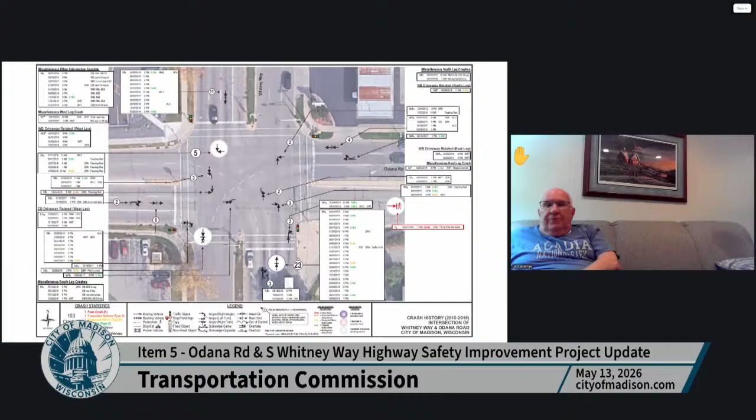So Tom, can we ask you to look at getting that crossing raised? Yep, I can look into that. Okay. So you don't need a motion or anything for that? You can just take that away as feedback? Right, yeah. Okay. So that's one thing that we can do. Is there anything else that people would like to ask Tom to look into? Anything else? Robbie.

So I'm just curious, are they moving where the signals are going to be placed? Is that what I heard? Like they're going to elevate them and they're going to be in a different position? So the big thing with this project is providing signal heads over each lane. You can see where they are existing on this aerial: one signal head here, one over here. This project gets a signal head over each lane, which is the standard of what we do now for new projects. Okay, what about Odana? Is there going to be a change to where people are looking at signals on Odana? Yes, same thing on Odana.

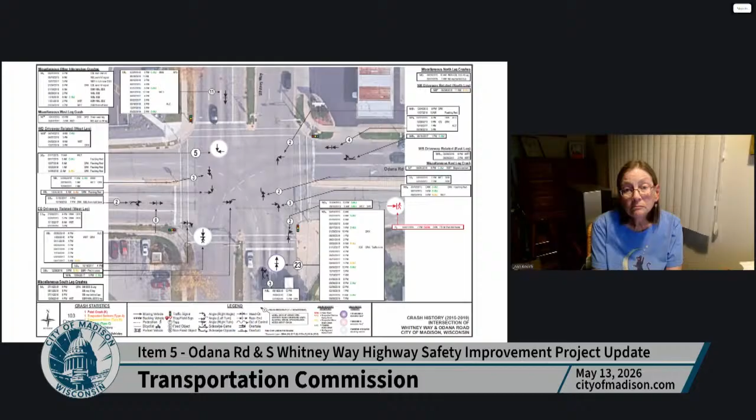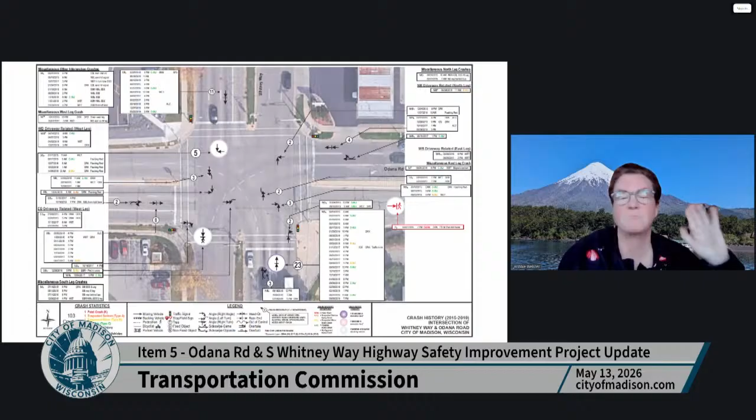Okay, the reason I'm asking is that I have been going through this intersection very frequently because I started working out at the Y. And this is, as others have said, a disastrous intersection for a whole host of reasons. The only way to exit the Y, if you want to go north or east, is to get on eastbound Odana. You cannot exit any other way. So there is a serious compliance issue with right turn on red for eastbound motorists. There are two signs, one on the near side and one on the far side of the intersection, that say no right turn on red, and they are regularly ignored, which means they are not looking for pedestrians when they're making that movement.

And so if we're going to be changing the position of the lights, I want to make sure that the prominence of those signs is also considered, so that maybe the drivers will notice them. Yeah, we can do that. We will do that for sure with this project.

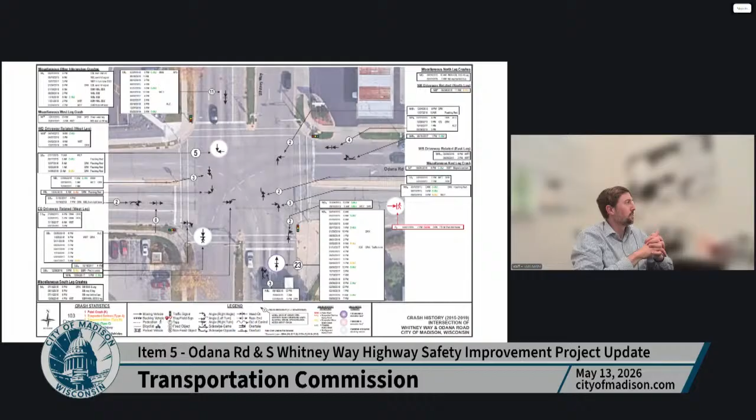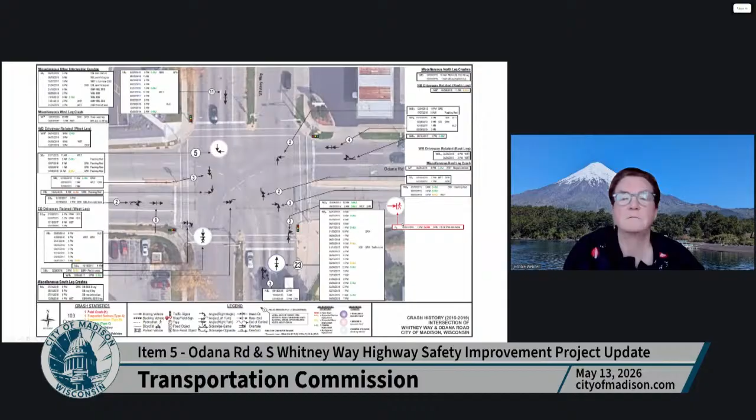I mean, there's all kinds of other issues with this intersection, but I realize that it is beyond the scope of this particular project. Others have brought up lots of concerns, but it's bad. And I will just throw out there that we have in past meetings talked about plans for the Beltline and expansion of the Beltline. I am convinced that one of the reasons this intersection is so bad is its proximity to the Beltline, because at least in the afternoon when I am there, a lot of drivers are headed to the Beltline and nowhere else. So that's just FYI.

I didn't realize I didn't show this slide, but that's part of the issue here: there are basically three access points to the Beltline. There's Midvale, Whitney Way, and Gammon Road. And all three of them are congested during the afternoon. So it's just a lot of traffic using minimal points here that are causing the issues, especially at the ramps and then at the adjacent intersections, which is what this is.

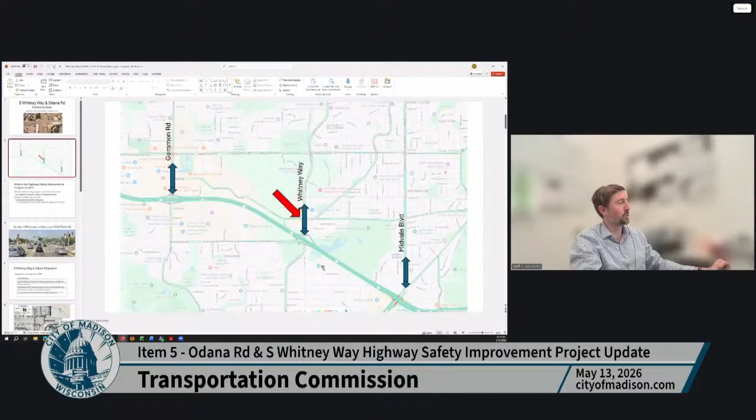So we do struggle at times with traffic backing up to the Beltline. Obviously, especially with WisDOT involved, that's kind of their number one priority, to keep the ramps from backing up. Right. So I'm just going to make sure that everybody is

understanding the point, that expanding the Beltline does zero and probably has extremely negative effects on our local streets. That was part of my point: you expand the Beltline, you dump more traffic onto our local streets, you make it much worse. And the proximity of this intersection to the Beltline is a serious problem now. If the Beltline is expanded, I do not see that getting better. I know that's outside the scope of this project, but I had to say my piece.

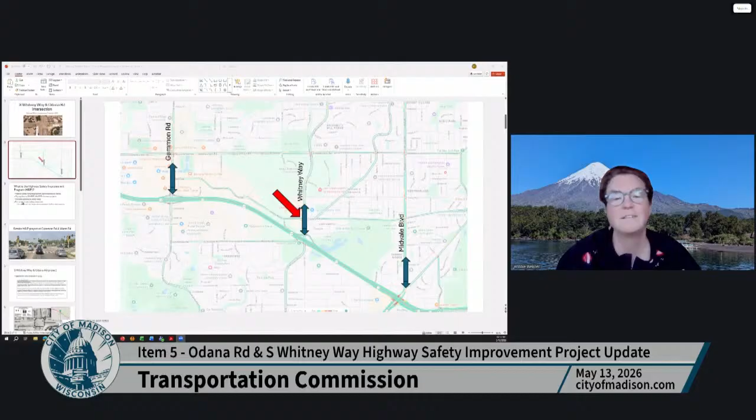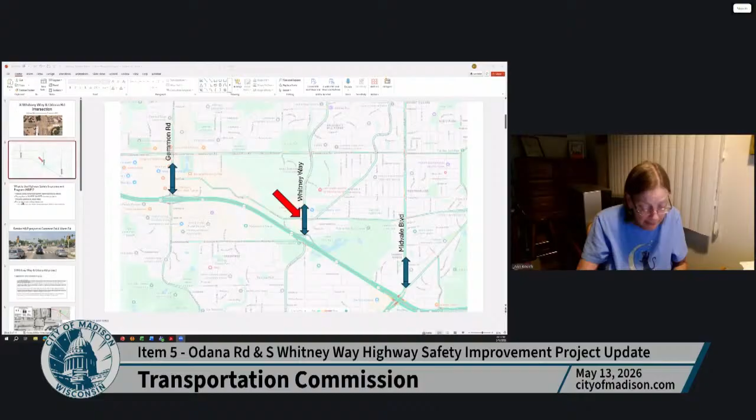Thank you. Yeah, proximity to the Beltline certainly impacts it, that's for sure. Other comments or questions? Okay, thanks, Tom. Next, we have reports from members of other BCCs. Anybody have any reports for us today? No? Okay, we'll be interested, Harold, to hear from you after Regent Street goes back to Board of Public Works. I don't have any announcement tonight.

Future agenda items. The June 3rd meeting, we have the Southeast Area Plan and the Southwest Area Plan, which were both referred to TC by the Common Council. We're going to try again for the No Right on Red review and discussion. Crossing guard assignment update and approval; we need to do that because of the timing.

Christoph's hoping to get the Department of Transportation annual operations report on the agenda. Potentially the Perry Street connection study, annual crash facts report, Vision Zero progress report, and I'll have a brief update from the Transportation Commission Appeal Subcommittee because we have an appeal hearing scheduled on May 19th. Not sure if we'll fit all of that in, because that's a lot, but we'll see. Anybody have any other future agenda items?